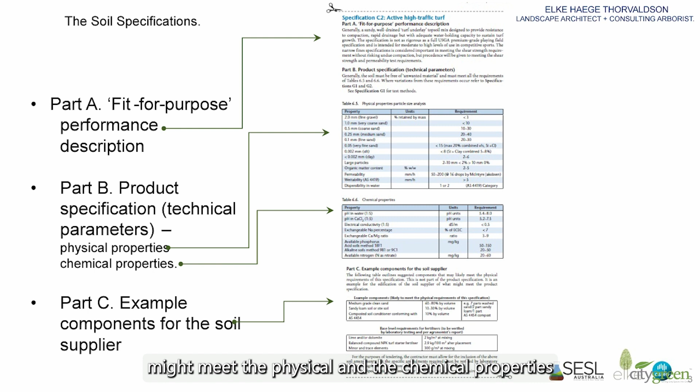It was the first time that a soil specification was a product specification, as opposed to a recipe style specification. So it outlined target ranges in chemical and physical properties with example components that might meet the physical and the chemical properties for the soil supplier, as well as the first component, which was a bit of a description or a performance descriptor. These specifications were published in 2014 and then reprinted in 2018, and they're also available as an online download.

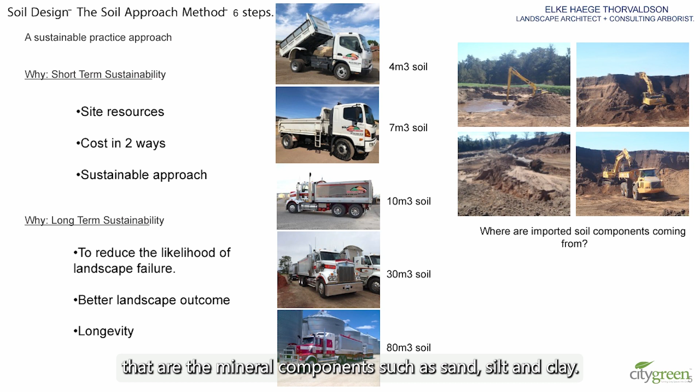But the book also introduced the soil design approach method, which challenges the designer and landholder to understand that site soil is an asset. The method prompts the designer to think about where the soil resources are coming from, the transport needed, and encourages the use of site soil. Soil resources include mined materials that are the mineral components such as sand, silt and clay. These photos are from a Sydney creek bed which is currently being mined or dredged by a large soil supplier in Western Sydney.

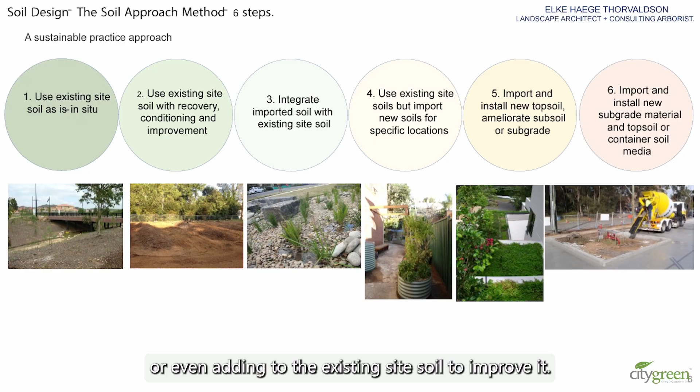The soil design approach method has 6 steps from optimal to least optimal. From using existing site soil being the optimal, and obviously in some cases that's not possible, to ameliorating the site soil if you can, or improving some of the site soil, or even adding to the existing site soil to improve it. And then there might be some locations in your project where you can retain some of that soil, or you might need to import a little bit of soil into some specific locations in the site project. And finally, the least preferable but sometimes unavoidable option, and generally the default option up until more recently.

I'm seeing a lot of change now, which is great. That sort of 90s and early 2000s approach was just to import new site soil. Today we do it for things like green roofs and green walls and vaulted landscapes. So yeah, there's still absolutely a need for it.

Apologies for that little cartoon soil truck zooming across the screen. It's incredibly cheesy, but I want to hopefully remind you about the transport cost and associated environmental costs of transport to and from site if you're importing soil, and also think about the tipping fees. Soil goes to landfill, it has to get treated as contaminated. As well, have a think about the transport within a large project, the truck movements across the site, where the stockpile of your soil might be, and where you might be able to save some of the existing site soil.

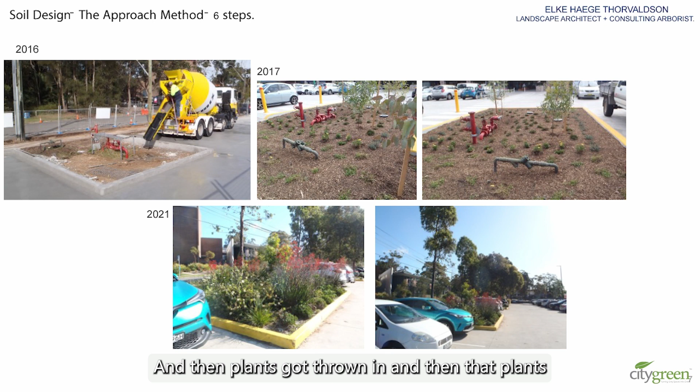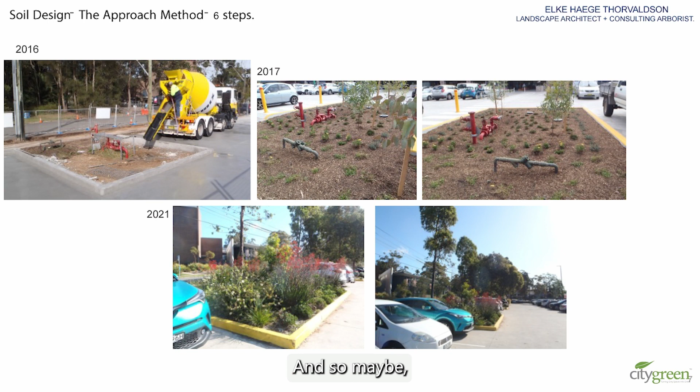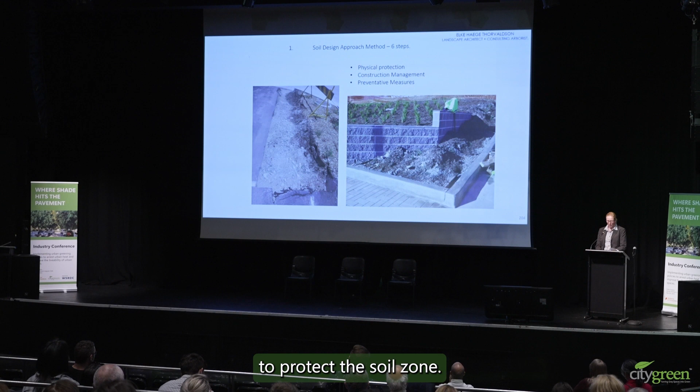Obviously that's not the best case scenario, but it would have been a much worse case if this hadn't been picked up and the plants got thrown in, and then the plants would have failed to thrive and or died after a year or more. The builders would have long left the site by then, and so maybe the rectification would never have occurred anyway. How can we avoid this sort of stuff? Fencing and physical barriers can be useful to protect the soil zone. We can retain landscape areas on site and exclude construction contamination.

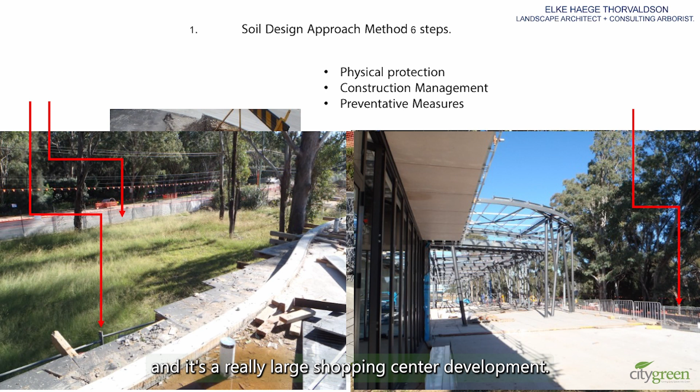Avoiding having to replant this zone in this photo is also less costly to the developer. Philip mentioned undisturbed soil networks as well, which is another key driver. So that photo you previously saw, this is during construction, and it's a really large shopping centre development, and if we hadn't fenced this area off, it would have also been completely contaminated with site

contamination or construction contamination. Other protection can include mulch, ground protection boards, such as where you've got scaffolding, you can put some ground protection boards under. Where you want to stop migration of construction waste, such as silt and dust barriers, shade cloth, erosion and sediment control barriers, such as sandbags or hay bales, and then diversion of contaminated site waste during construction, both liquid and dry. Or in larger zones, you can do some hydroseeding, and also there's the stockpiling.

So in 2014, Simon and I, also through this book, Soils for Landscape Development, we first developed and introduced a recommended minimum soil volume estimator. This was the first time that more than one or two factors were combined to consider soil volumes for trees. And just to preface, this is for urban trees. We're not talking about forested areas and things like that. We're talking about trees that are in limited spaces.

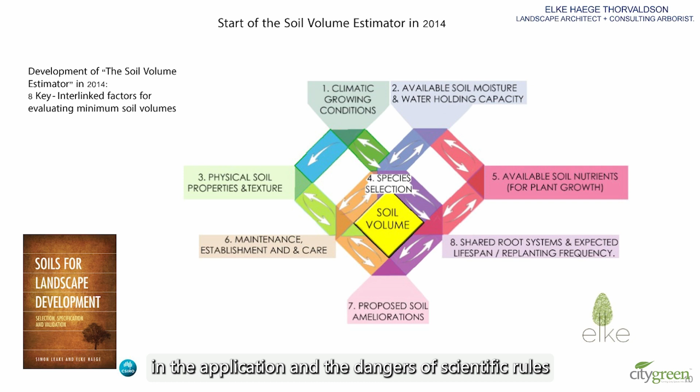So we introduced these 8 interlinked key factors for evaluating the minimum soil volumes. And these all appeared in that appendix of Soils for Landscape Development, where we discuss, amongst other things, the awareness that we need in the application and the dangers of scientific rules being applied to biological systems. So you'll notice that I won't ever use the word calculator, because it's not a mathematical formula that we can use.

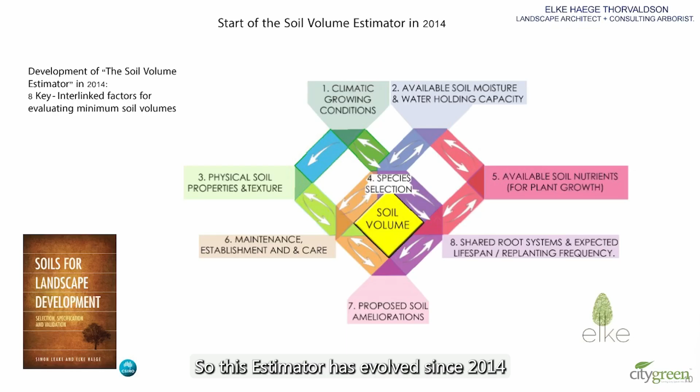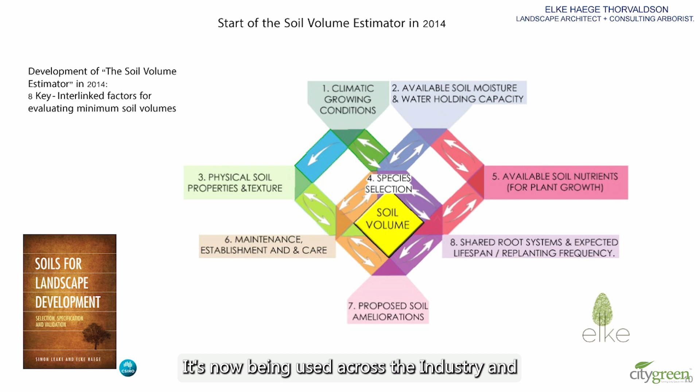We have to always be really considerate that trees have biological systems, they are living organisms. I'm sure Dr. Kim Liu will touch on the fact that we are living beings, and there's not just a one-size-fits-all type of tablet that we can take and we'll all be fixed. So this estimator has evolved since 2014 to be much more user-friendly, which Ross will be happy about, and it's now online and freely available with a series of drop-down menus. It's now being used across the industry and in regulatory documents in Australia and internationally.

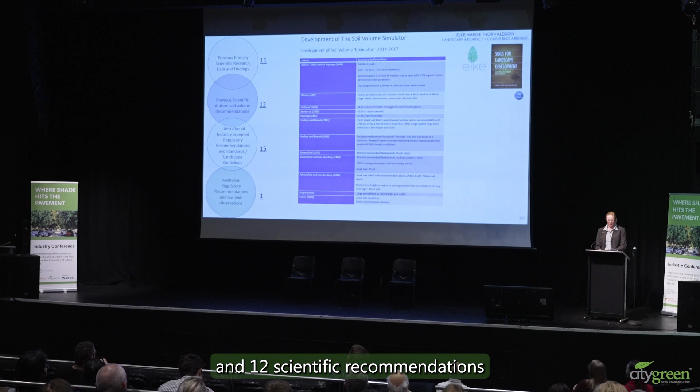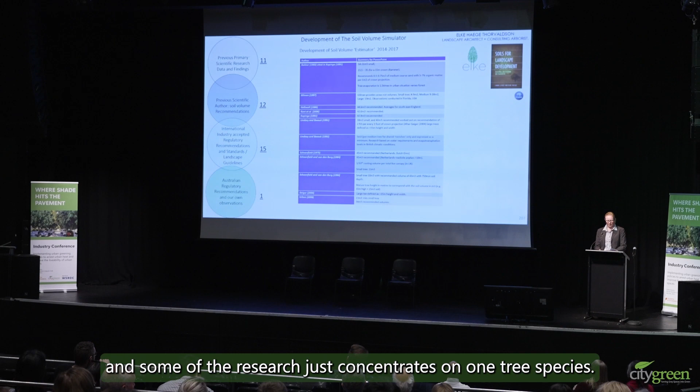We looked at 11 key pieces of previous primary scientific research findings, and 12 scientific recommendations, which we summarised and outlined in Soils for Landscape Development. The research comes predominantly from studies in Europe, the Netherlands, Southeast England, USA, and some of the research just concentrates on one tree species. Tree size definitions were also a really good consideration in assessing all of this research. Out of this, the 1992 Lindsey and Bassuk research is the first time that shared trenches is mentioned, which is again talking about connected soil networks. And that was introduced with their research really concentrating around tree evaporation and wind throw.

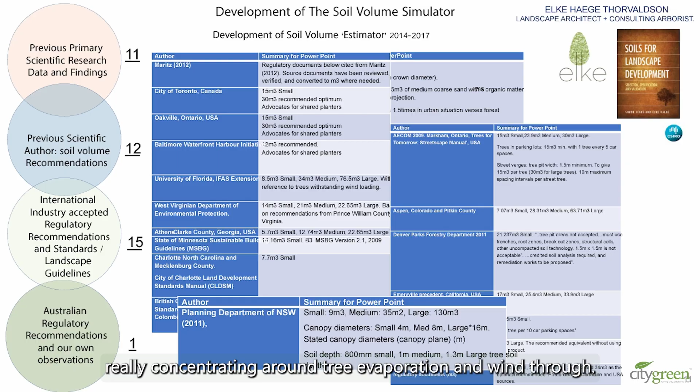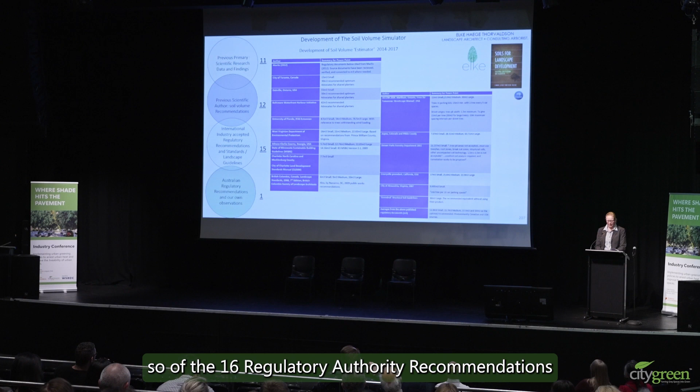Of the 16, so 15 international and 1 Australian, regulatory or authority recommendations, and we looked at landscape guidelines and landscape standards, in 2009 was the first time tree ratio to car park numbers was introduced, thinking about Gwilym and Ross's photos of trees in car parks. Most of these landscape standard documents are not referenced. Most of them are from Canada and the USA. And the tree sizing that they quote is really varied. So generally these recommendations seem to be a bit of a one-size-fits-all approach, no matter the tree species.

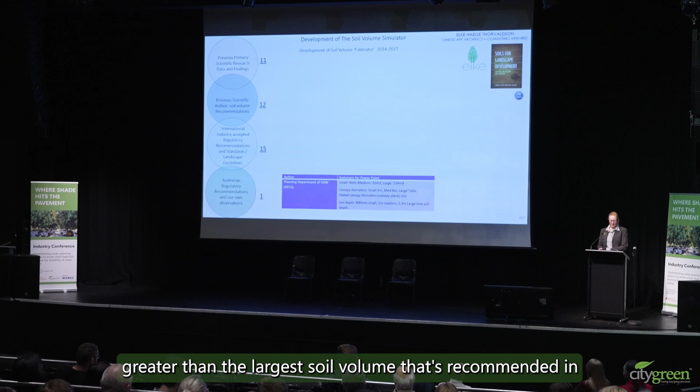What we saw as the danger was that the regulated minimum soil volumes could run the risk of reducing the number of trees being planted. Even so, all these documents were really useful in discussions that Simon and I had about trees that we knew about and planted and watched grow, defying all of these volumes that were being quoted, as well as applying these volumes to real-life examples in the Australian context, and the concepts of deliberate and acceptable stunting. So generally the authority documents were the same or less than the recommended volumes in the primary research, except for the Australian example, which you can see there. This seemed to recommend a volume about 3 times greater than the largest soil volume recommended in any of the other research or the landscape guidelines.

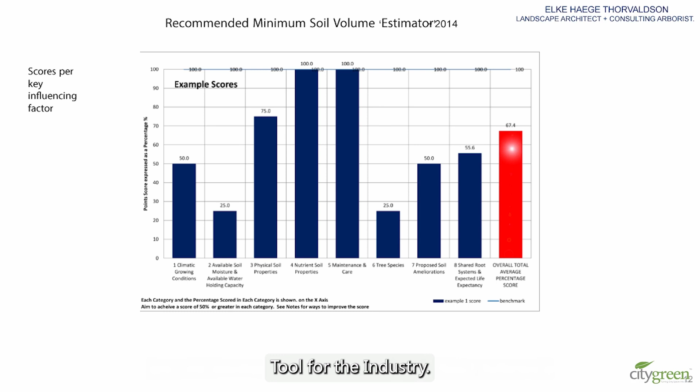So in the 2014 version, this generated a results chart and a recommendations graph, but we wanted to make this method much more user-friendly, and we wanted it to become a quick, ready reference tool for the industry. And in 2017, we launched the Soil Volume Simulator, which you can feel free to Google. You can either Google Soil Volume Simulator or Elke Soils, and it should come up. I will run through what it looks like, so you don't need to. The danger we could see was that we still wanted to advocate for planting trees, particularly large native trees. This soil volume simulator needed to accommodate tree stunting in lieu of no tree being planted at all.

We have all observed trees growing in available soil volumes that are much less in volume than the commonly recommended soil volumes from the literature. So by providing this soil volume simulator, we hope it will encourage tree planting and not the opposite.

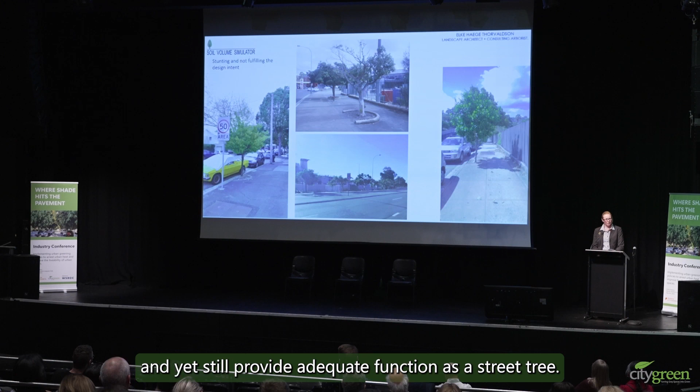For the most part, trees will stunt according to the volume of soil and hence water and nutrients available to them, and yet still provide adequate function as a street tree. We introduced the use of design size at 15 to 20 years, which I'll talk about in a moment, to allow for the fact that a stunted tree might provide a perfectly adequate design response as intended, or not, as you can see in these photos.

And so these stunted trees will never fulfill the design intent or provide shade or canopy cover or reduce the urban heat island effect as intended. Does everyone know those trees at Woolloomooloo, just next to the naval base? Yeah, I think they've been there maybe 50 years. They're fig trees. And then there are the exceptions that defy all odds and are truly wonderful contributors to our urban habitat.

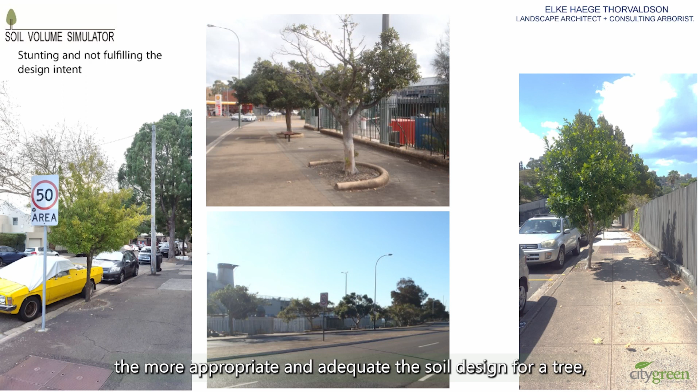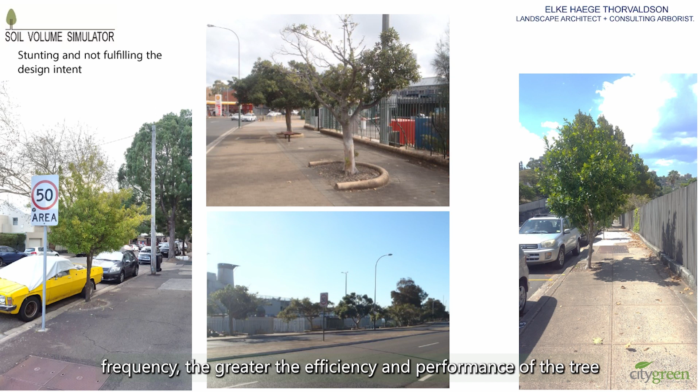The findings we learnt were the more appropriate and adequate the soil design for a tree, the higher value of the tree, the lower cost for maintenance and replacement frequency, the greater the efficiency and performance of the tree, and the more it contributes to the urban ecosystem, and the shorter time that it takes for the tree to reach its potential, which is quite important with all the canopy targets that we're trying to meet.

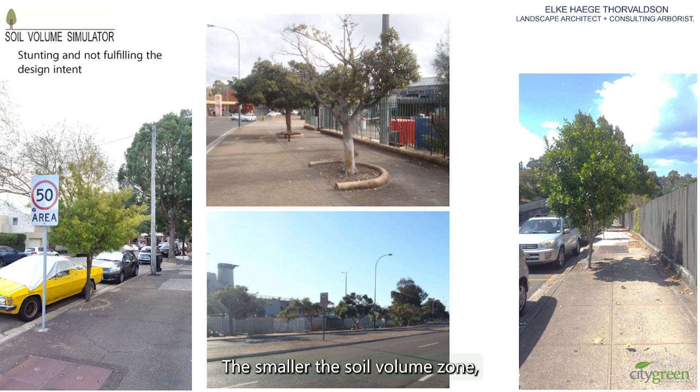The smaller the soil volume zone, the more susceptible the tree is to climatic stressors such as drought and flood and nutrient deficiency. The life expectancy of the tree is significantly reduced and its pest and disease resilience low, as it may be stunted and may provide poor amenity and less shade. The tree is also less healthy and more likely to be unsafe structurally and unstable.

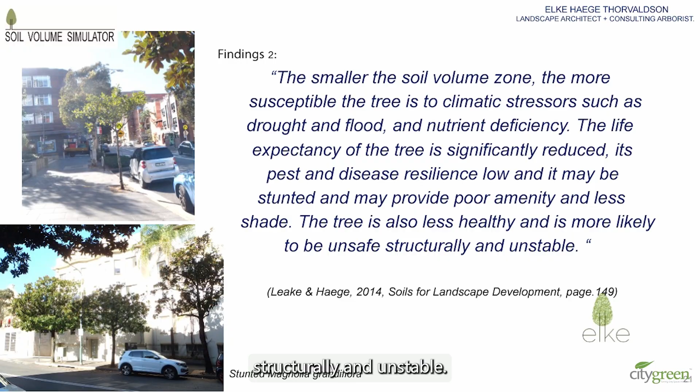With the design size height being at 15 to 20 years, this is opposed to what developers might Google to find out what the tree height is going to be, yet it's a tree height in a forest with no impacts to it, and then you have to explain to the developers that no, the tree does not grow to 40 metres in this circumstance. So that's actually a really good tool, this soil volume simulator, to help explain that.

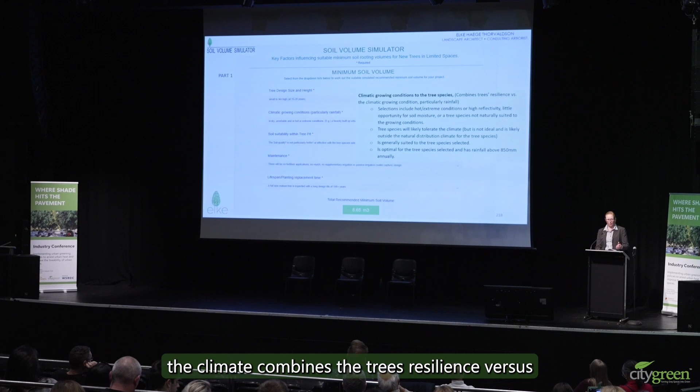So this also differentiates between the tall, slender species that we have, such as some of the eucalypts or Agathis robusta or Araucaria, versus a more squat or umbrageous species like the large ficus or Magnolia grandiflora. We've also got climatic growing conditions, which combines the tree's resilience versus the climatic growing condition that you're in, particularly rainfall. So the selections are related to both that climate and the tree's natural characteristics, or what it prefers with rainfall.

We also have soil suitability within the tree pit. There we go. Ranging from not very fertile soil to an optimum soil media that's being used. Also this one accounts for if you're doing it on podium or on slab areas. Then there's the maintenance component. So if you're planning to have from no maintenance or very little maintenance up to a really good amount of maintenance, and this also combines if you've got irrigation occurring as well, or passive irrigation.

And then the last one in this part is considering tree lifespan and replanting or replacement time. And this is a really good prompter at the design phase to help dictate whether you can have a reduced soil volume. So if you're having a short lifespan or turnover of a tree, you can reduce the amount of soil that you need. On the flip side, if you're expecting over 99 years from your tree, you're going to need some larger soil volumes. Think of the pantry of food that you might need for a short time versus a long time. That's sort of what the tree requirements are as well.

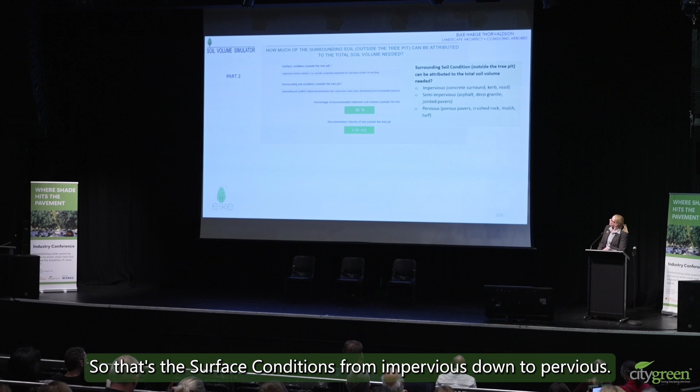So then there's part 2, which introduces connecting or bridging to nearby soil zones and the consideration of shared root zones. The drop-down options consider the surface conditions as well as the soil conditions. So that's the surface conditions from impervious down to pervious, and then we've got the next one, which is the soil conditions outside the tree pit. So if you're planting in a zone next to a lawn that is growing really well and has good drainage, then you're going to have relatively good soil conditions outside the tree pit itself.

This simulates the effectiveness and quality of the tree's ability to utilise the surrounding soils. And then it just gives you an option to plug in what that situation is going to be for your scenario. What would that look like?

So the tree on the far right image and the tree on the far left, the one in the foreground, they have little to no available soil outside the tree pit, whereas the image in the middle shows available tree rooting soil under the turf, as well as the loose unit pavers for air and water exchange. And then that tree on the far left is about 35 years old at a very conservative estimate, not really providing much shade.

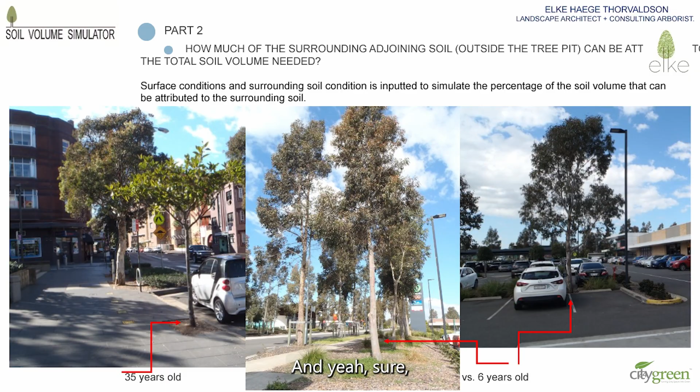And these trees are also in the eastern part of Sydney, whereas the two photos on the right are Richardson Road, Spring Farm project. And yeah, sure, maybe it's not the ideal volume of soil, but after 6 years they're already starting to provide some shade through their linked rooting systems, etc.

So then the third part of the soil volume simulator, there's only 3 parts, and this third part is not necessarily compulsory. It considers the shared root systems. Soil volumes can reduce per tree when you're planting multiple trees in the same connected, uninterrupted soil planting zones, such as the linked soil networks.

This relates to the ability of the trees to share and allocate nutrients, oxygen and water, as well as sugars through photosynthesis, by mostly connecting fine roots and mycorrhizal systems. The connected trees can also send out warning signals when there's pest or disease attack or poison via tree hormone chemical response, as the tree can tap into and draw upon a larger area. So in this way, the group of trees can be more resilient and a greater buffer to factors such as drought and poor soil nutrition.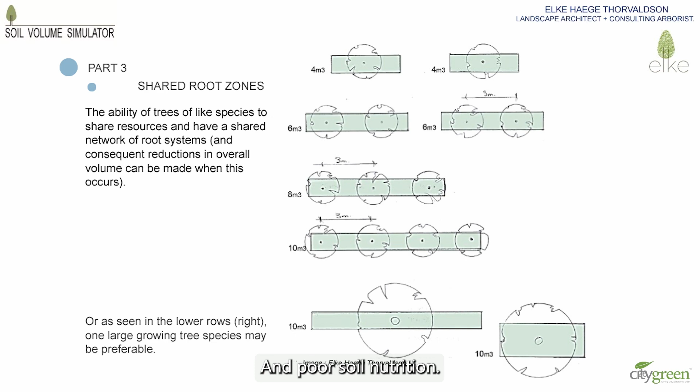I might just flip back 2 slides. So see that in the green boxes you get, I can't really read it from here, the recommended minimum soil volume for the number of trees selected. So you can show the reduction. I'll just flip back again. So the first part. Here we go. So that green box down the bottom gives a total recommended soil volume. Just for this example, it's 8.65. Then of the options we selected for this second part, it said you could reduce the soil volume within the tree pit by 50%, which takes it down to about 4.3 or so.

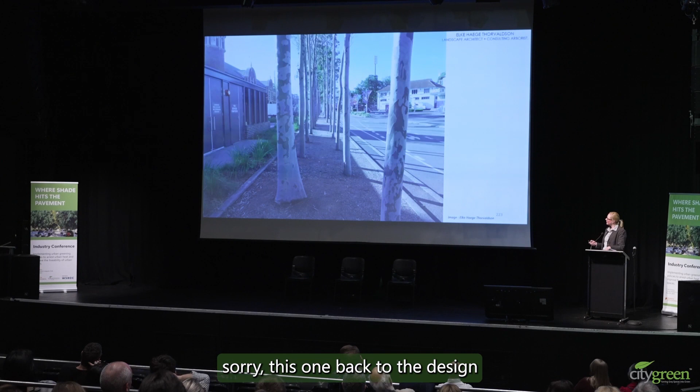And then when you plug in the shared root systems, we've only put in one shared root system here, it gives the 8.7 being for one tree, this is the volume you need, and then it also says the percentage of the soil volume that you can attribute to the external area. The designer can select whether they're going to have a greater number of trees in a space, or maybe select one really large umbrageous tree, which is what that diagram behind was.

I think I might be overworking the computer by going back and forward. Oh, we'll just stick with this.

So these are some examples of trees utilising shared root soil volumes or soil systems. And sure, whilst there's some tree stunting and maybe not optimal results in Gwilym and Ross's minds, and question time might be quite interesting, I believe that the overall visual effect is really useful, and the shade provided on a linear plane provides the desired outcome.

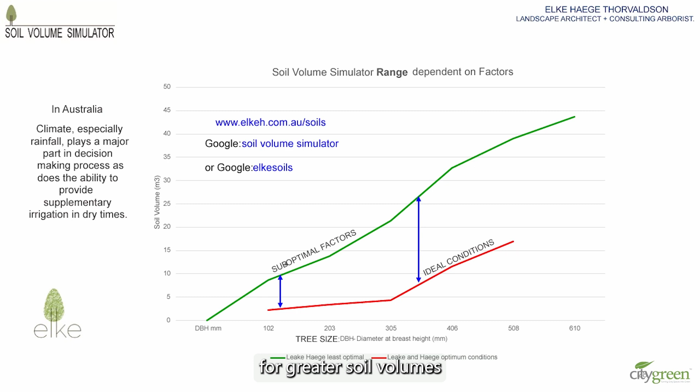So the soil volume simulator creates a range of volumes depending on the factors that you enter into the simulator. So we want you to use this as a tool to argue for greater soil volumes where factors like maintenance are reduced, or explain tree stunting, and to discuss longevity and replacement planting lifespans. How can you use this? Use this soil volume simulator as a backup, I'm thinking councils here, when trying to justify funding or obtaining maintenance budgets.

Use it as a tool to demonstrate achieving canopy cover through faster tree growth via larger soil volumes, or by better maintenance, or by irrigation. Use it to advocate for larger growing native tree species, or for demonstrating the urban heat effect versus stunted tree growth. Use the soil volume simulator when assessing development applications, such as to condition for connected soil rooting zones, or doing that via strata vaults, or just plainly arguing for larger soil volumes or larger growing tree species. And also use it in forecasting tree replacement timings and obtaining appropriate budgets for replanting.

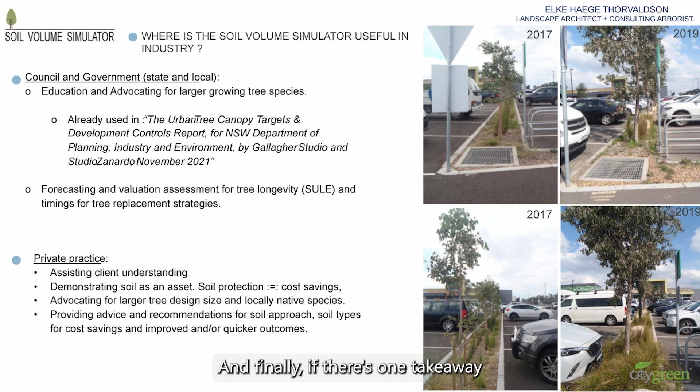And finally, if there's one takeaway from this presentation, don't be afraid to plant larger growing native trees.